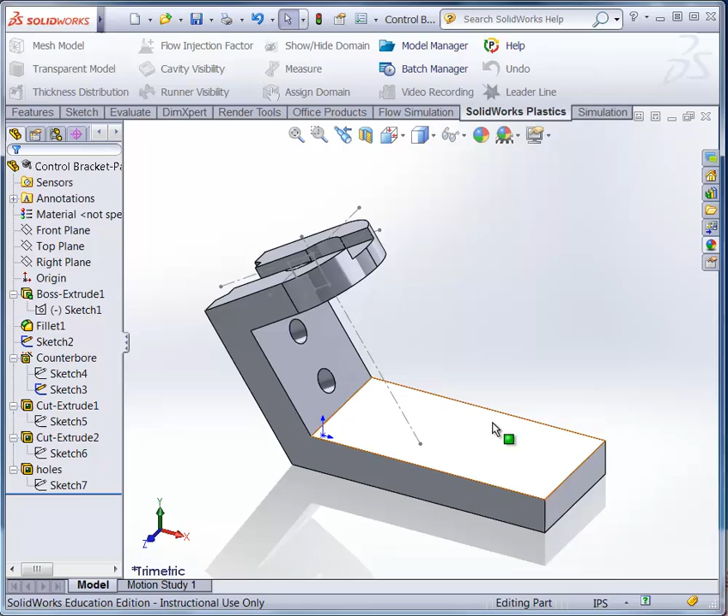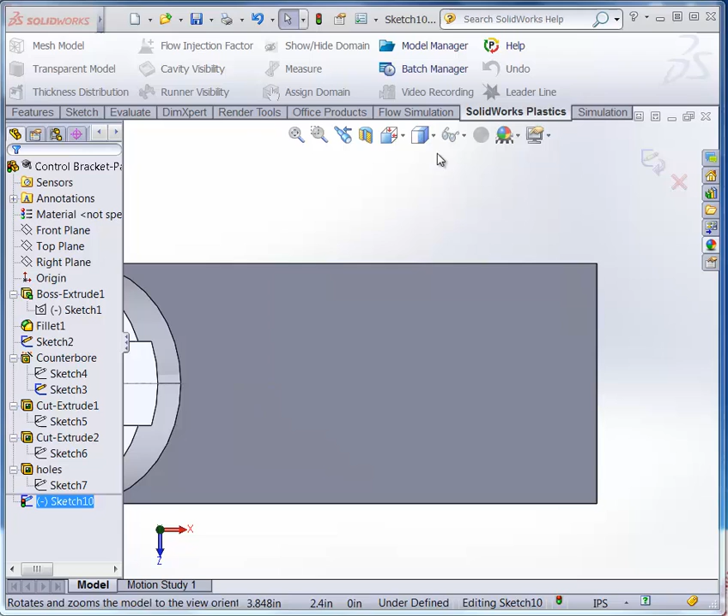All right, so to start, we can use any of the faces to create our sketches. So if I simply select this face and using the pop-up palette, I'm going to create a new sketch. Now, you can also see using the design tree here that I can make myself normal to that sketch plane, right? You might prefer this, or you might just work in isometric view or any 3D view, but your UCS for your plane is already set. So then now I can just sketch.

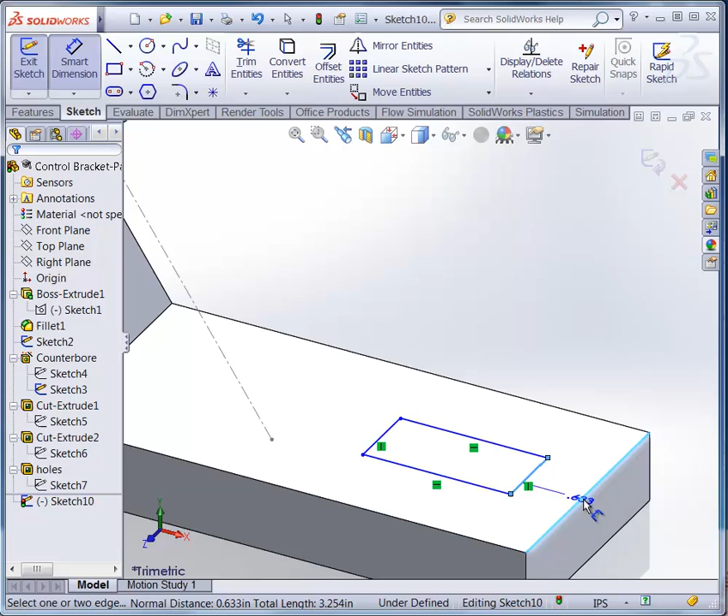I'm going to start with the sketch, just a simple rectangular sketch, and then I'll use Smart Dimension to constrain the geometry. So first off, I know that I'm 0.563 from the face. So if I select those edges there and then place my dimension, I'll set that to 0.563.

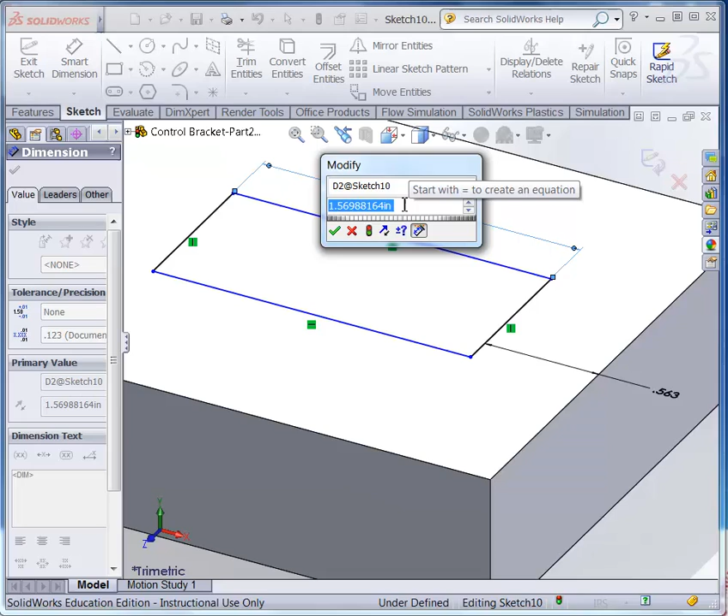Now to size it correctly, and I've got to center it, right? So to size it, I said we have a length of 2.25, and then we have a width of 2.

Okay, so you can see it's not centered, right? Now we could do this a couple ways. We can find the center of our sketch here, or we could just, I don't know, put a dimension here to the side and figure out how much we need to make it equal on either side.

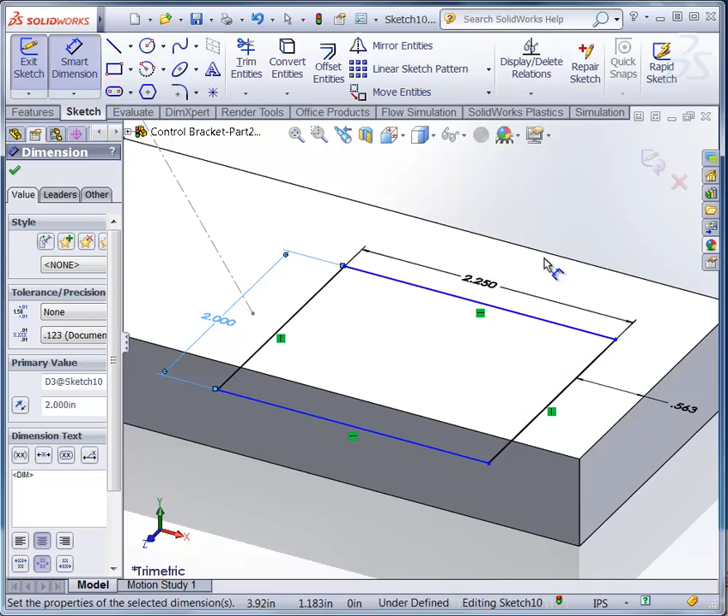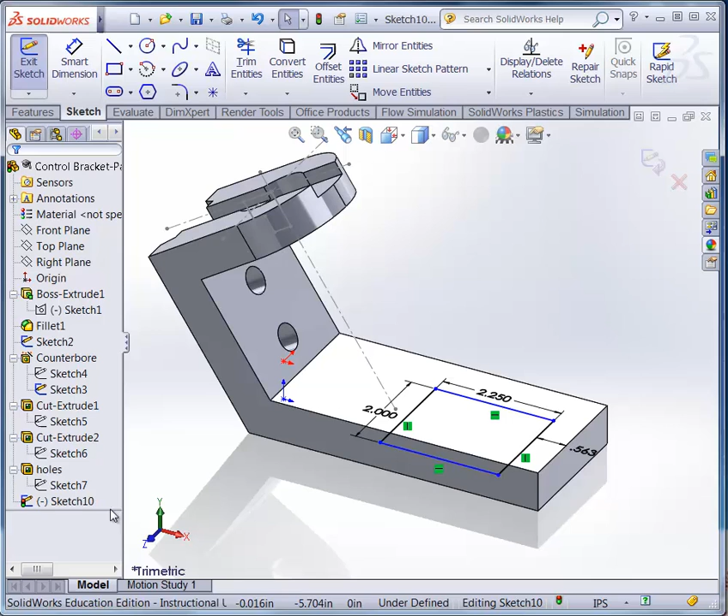So in order to maintain the design intent, I think what we need to do here is we need to use the origin as part of our reference geometry. Now one way we could do that is if I get normal to my sketch, all right, and we could visualize here the origin.

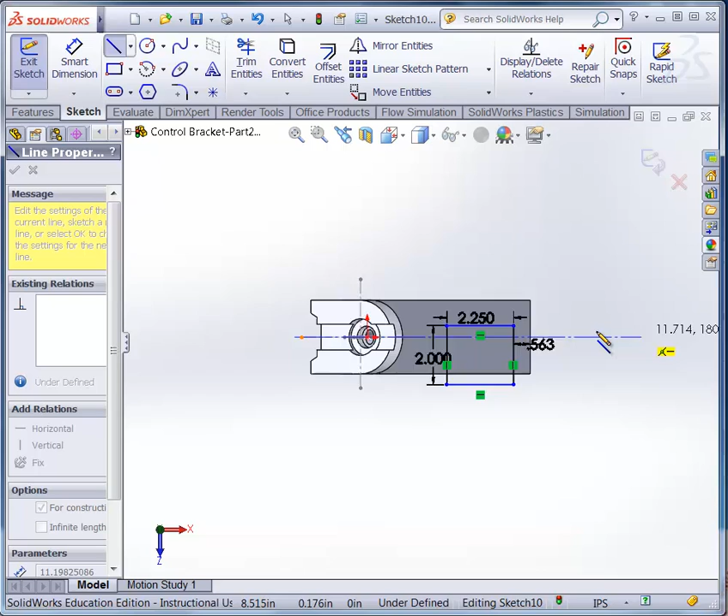What we could do is using a center line, let's track from the origin, right? You can see the other reference lines there. We can track from the origin and just establish a horizontal construction line. And you can see with your tooltips, right, if it's horizontal or not.

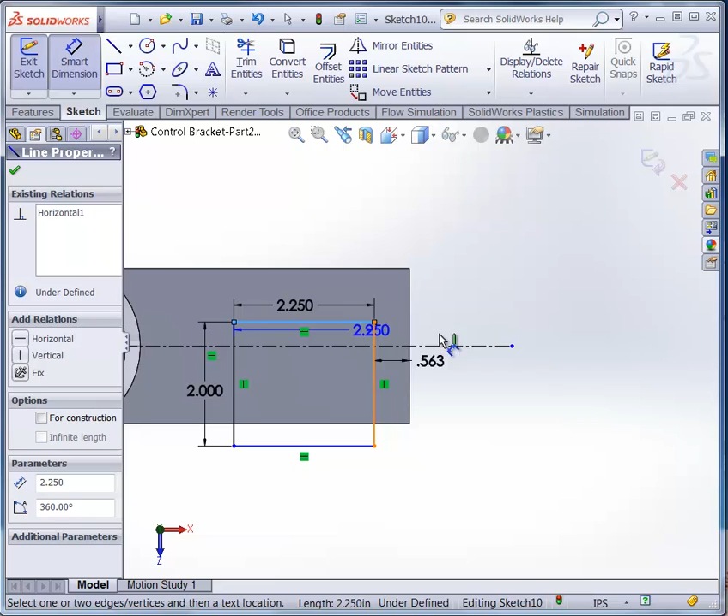Now with that reference line there, what we could do is now use a Smart Dimension from one of the edges, since we've already constrained the overall size. What's not constrained is position. So now if I click one of the sides and then the reference edge here, then this could be set as the half distance, right, which is going to be 0.5.

Or no, sorry, 1. Okay, sorry, that should be 1. There we go. So now we know that that's centered, and it follows that it'll maintain the same design intent that we had for the base. So that's a good way to set it up.

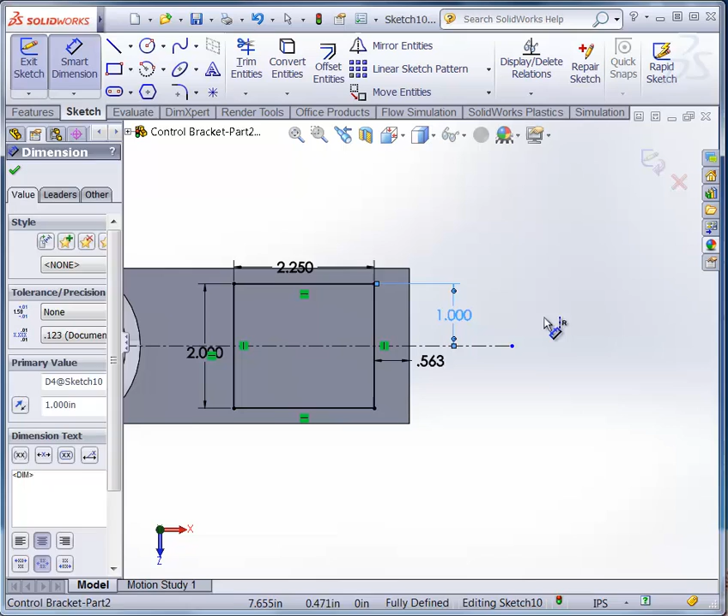Now we can switch over to feature, and then we could extrude it. Switching to an isometric view, I can see now more easily what direction it's going. You can use your design tree properties here to adjust that. We can go in a blind direction, and I believe here we're at 0.25.